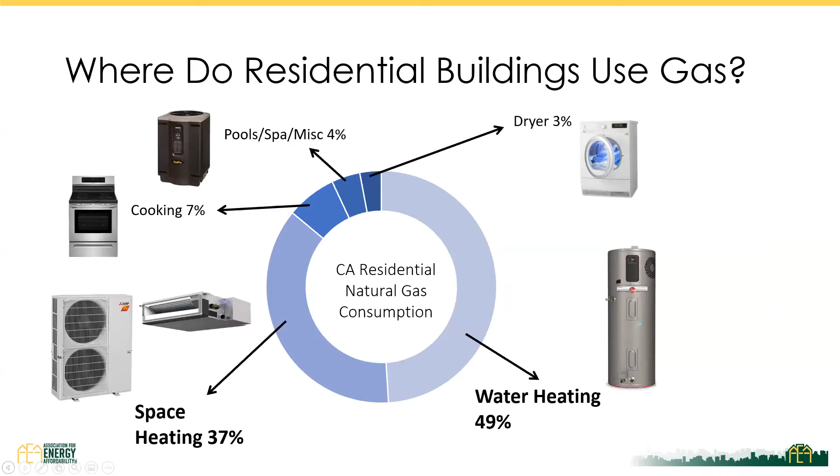And so these are all the buckets we've talked about. I know last weekend there was a lot of discussion on cooking. Today we're going to talk about space heating and water heating, because the reason why we're going this way for all electric—Amy set it up nicely, and I think you had an introduction last weekend about the multiple benefits here. From safety, from eliminating NOx and CO in our homes, to improving our indoor air quality, to achieving our climate goals, both locally and statewide, as well as improving our resiliency. And also, if you think about utility costs long-term and the opportunity to offset our electric utility costs with renewables.

I'm going to go through the next couple of slides pretty quickly because I think they should be kind of a refresher from other conversations. And so I want to get to the heart of it.

Just to put this in context here, this is not a flash in the pan. There's been a lot building in this way. So even in 2020, with our 2019 code, we had an all-electric pathway for residential, low-rise residential, which was huge, making it much easier to build all-electric. Today we have over 40 jurisdictions that have all-electric new construction ordinances. We have CCAs and utilities looking at carbon-free electricity and offering that option. And as we look forward to the future, these policies that are driving activity today—we have 50% of our electricity provided by renewables by 2030, and we're doubling our energy efficiency.

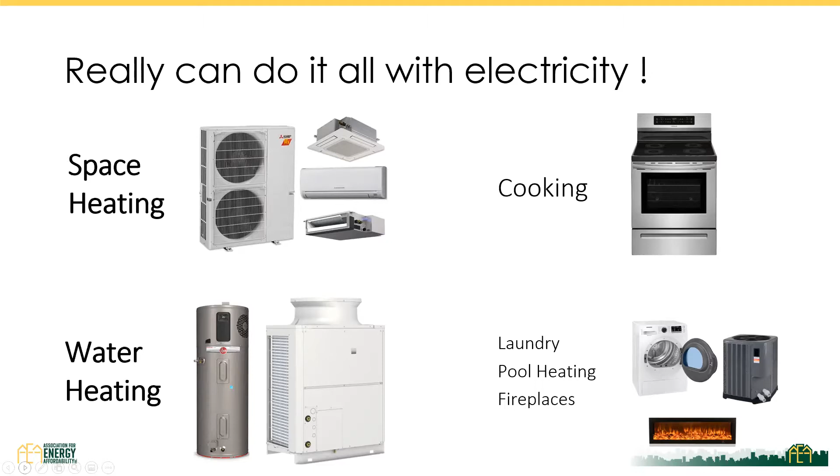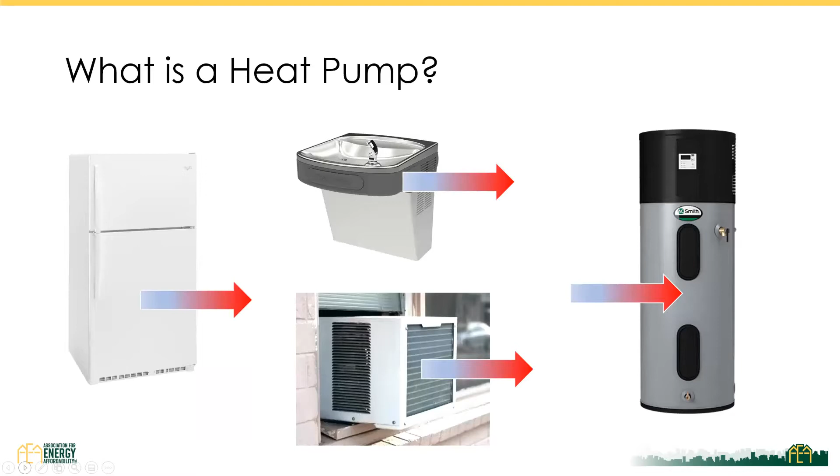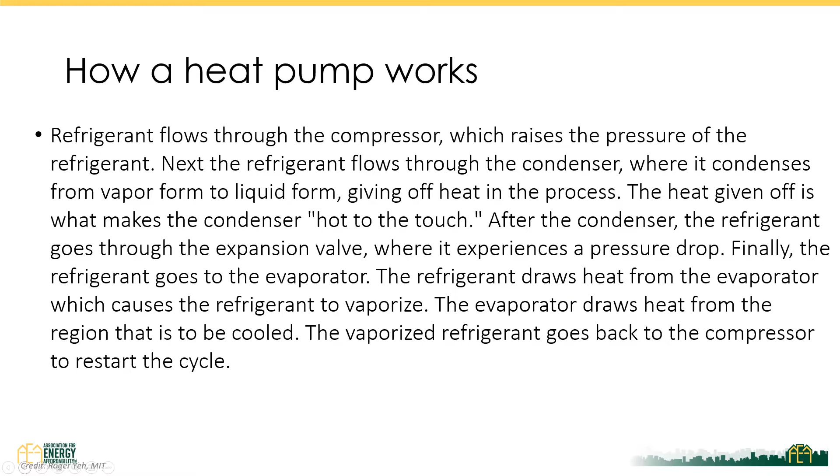So essentially, you can see all of these are moving cold air to hot air in some fashion or the other, depending on the intent of it. And so this is what a heat pump does. You're never going to say that at a cocktail party or at a gathering. That's a little more complicated. What you need to know is it moves heat from one place to another using a refrigerant. It's that simple. It's like air conditioning, like a refrigerator, right?

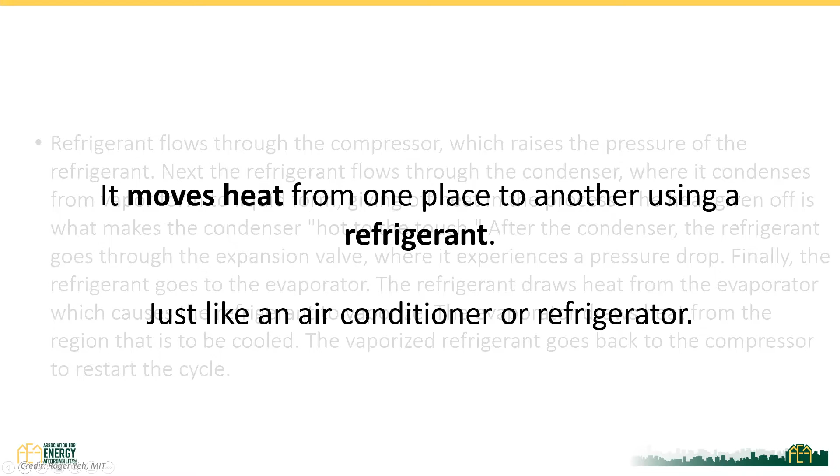Our refrigerators are expelling heat into our kitchens. Air conditioners are pulling heat out of our rooms and expelling it to the exterior. And so it's really just a simple process. If we think about our high school physics days, going back to that, as we think about moving things from high concentrations to low concentrations, it's pretty basic kind of principle here.

So really, when we're looking at heat pumps, we're looking at high pressure. You can see on the right, it's moving through and it's being compressed. And when we compress things, they get hotter, right? So they can gain heat. And then as things move from high pressure to low pressure, when we release that pressure, they can release heat. And so it goes through the cycle of high pressure to expel heat, lower pressure where it can absorb heat.

And it will run through that cycle of that refrigerant cycle, either drawing heat from the inside and expelling it like an air conditioner. Or in the reverse, as we talk about heat pumps with reversing valves, you're going to be bringing heat into the home. So you'll be pulling heat from the exterior and bringing that into the interior of the home.

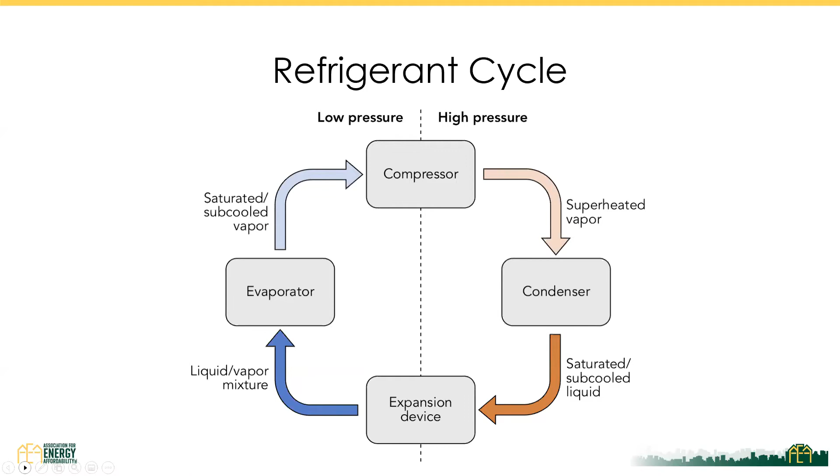So why do we really like heat pumps so much? A couple of great things: they're super efficient. If you look at heat pump ratings, they're about 3 to 5 times as efficient as our gas products. Even our most efficient gas furnaces, like the condensing furnaces some of us may have in our homes, are about 98% efficient. Heat pumps and heat pump water heaters are greater than that. An electric resistance water heater is 100% efficient. A gas water heater that we also may be used to, the gas tankless, is like 76 to 78%. I'll talk about water heaters in a moment.

They enable zero emission buildings, because they are electric, we can offset them either with on-site generated clean energy or if we are getting clean energy from the utility. They improve indoor air quality, because we're not having combustion in our homes, we don't have gas lines in the building. We can also deliver heating and cooling with a single system because these heat pumps have a reversing valve—they provide heating and cooling. And there's functionality to work in different climates, and we'll talk about the different configurations of these systems that can address different existing buildings.

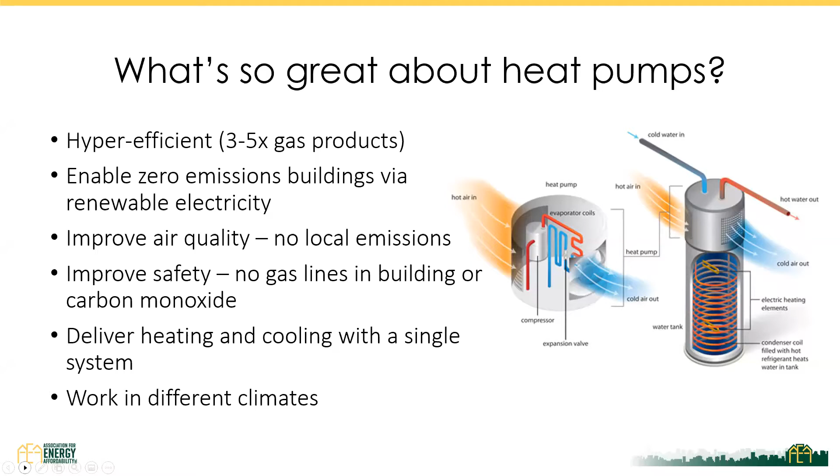So let's talk briefly about heat pumps for space conditioning. Following this, there'll be tours of different homes with these different systems in them.

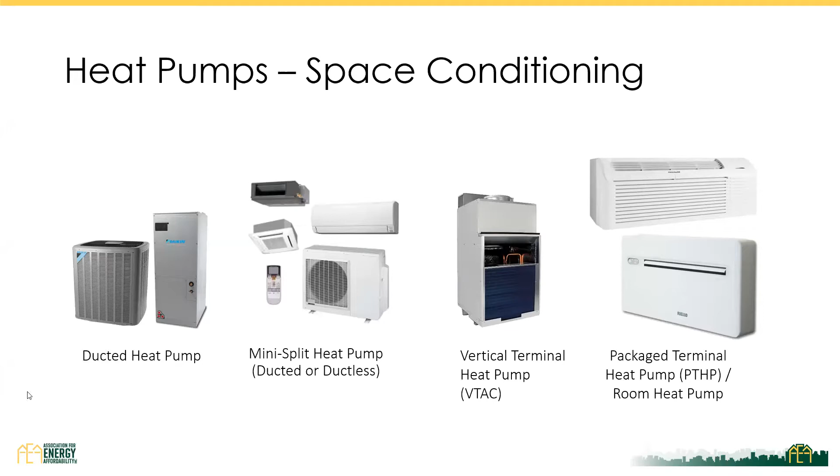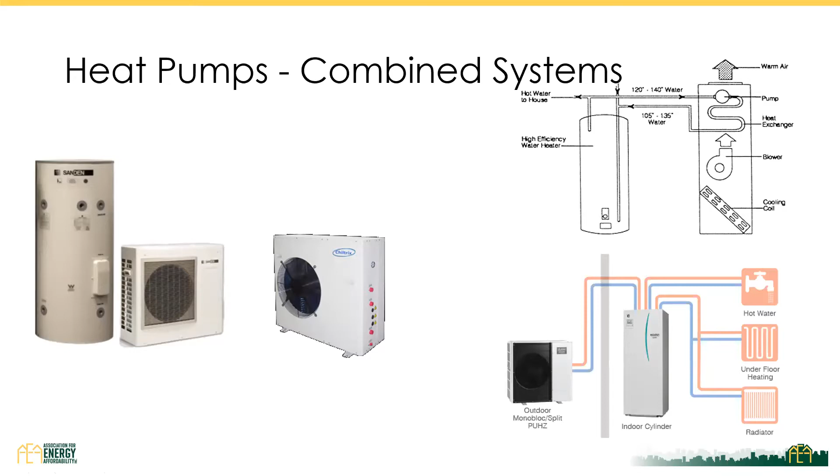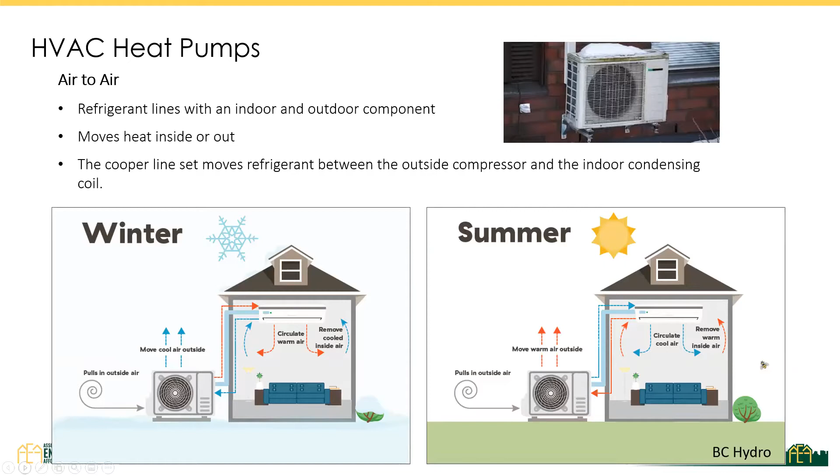So some things to consider as you're listening to the different tours—you can hear where selection made sense for different home configurations, loads, and needs. First off is feasibility and constructability, what can actually be installed. I showed you a variety of options that can meet different loads and building considerations. So as you're looking at what's available, what space there is, and what the load is, maybe the package terminal heat pump is a good option, or maybe you're looking at a slim ductless or ducted mini split.

This may also be informed by electrical capacity—you'll be hearing about smart panels later. We're often thinking about that load calculation, so we can consider what systems can fit into an existing panel or be accommodated if doing a panel upgrade. You also have to think about costs: first cost, maintenance costs, and lifetime costs. Lifetime costs should be going down for electricity, particularly as we look at future rate changes and the contribution of PV to offset our loads. And last but not least, you have to think about the AHJ—authority having jurisdiction—who is authorizing those permits.

So there are some considerations in terms of visibility from the street for that outdoor unit. Are there considerations for setbacks on where you can locate that outdoor unit on the side yard? Are there particular noise ordinances?

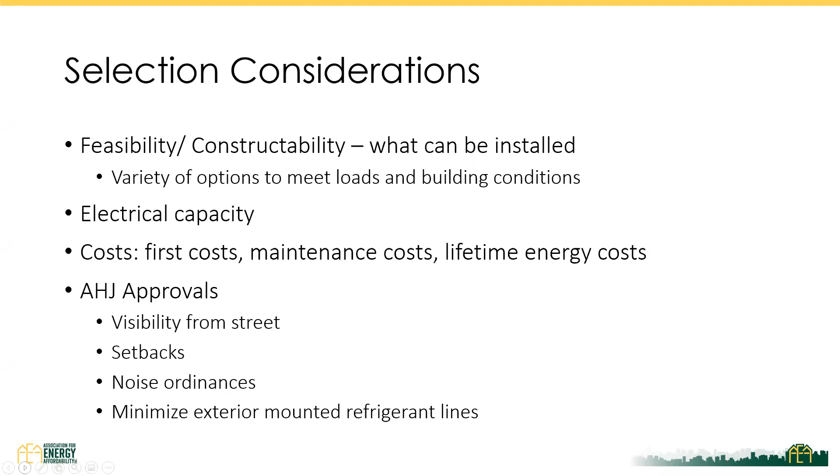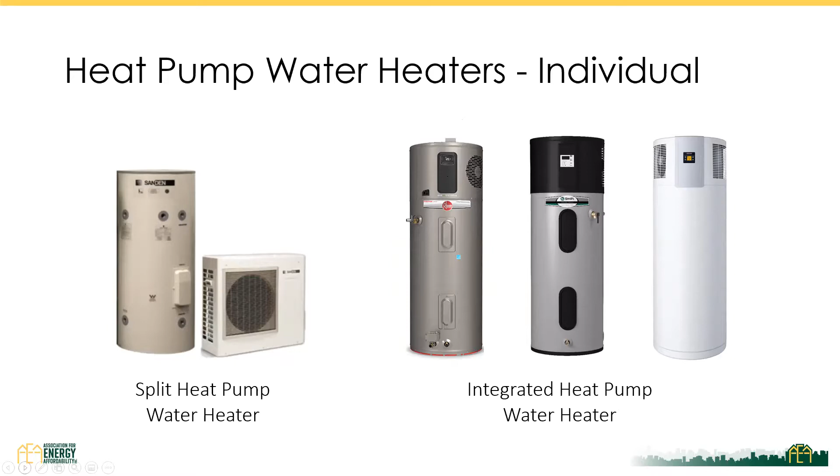So I have two different kinds of systems. I'll talk about some considerations in a minute. Again, all of these are electric. They employ storage tanks. Most have a heat pump, that compressor, and a resistance element, which is the electric resistance element. We look to operate them to maximize the heat pump operation because that is the most efficient - it's just moving heat from one place to the other - and only utilize the electric resistance element to address higher draws, additional capacity when needed, as a boost. Some, like the split system, don't even have an electric resistance element.

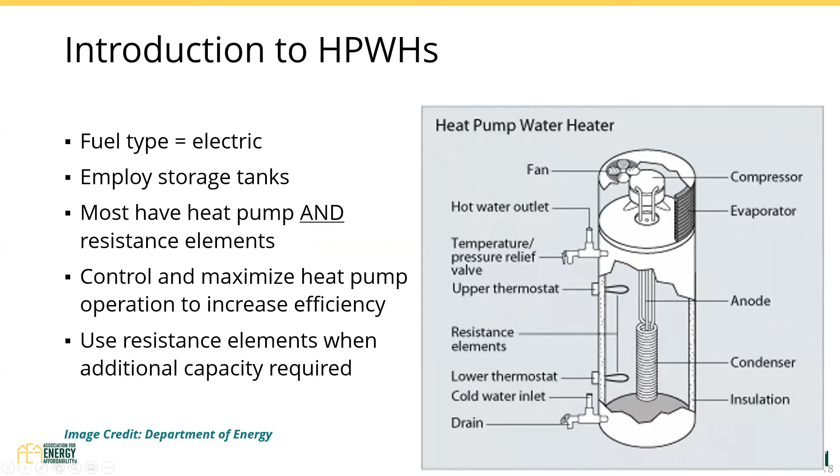I just want to point this out because there's a lot of questions. Under the 2019 code, you can install heat pump water heaters and they can replace gas storage water heaters. I saw a number of you raise your hands that you have a gas water heater in your home. Just calling this out because it has evolved in the code over time, and the code is encouraging heat pump water heaters in new construction.

So a couple of things on installation, and then I don't know if we have time for questions, or I can answer questions in the chat. So a couple of things.

Most require 240 volt 30 amp electrical supply. Some of them are 240 volt 15 amp. We do have some coming on the market that are 115 volt, 15 to 20 amp, kind of retrofit-ready for smaller loads. That's really looking at how to balance out achieving all-electric homes and minimizing capital improvements or electrical infrastructure upgrades. So we're having new product to address that.

Like gas water heaters that need makeup air, heat pump water heaters also require access to an adequate volume of air or ventilation, because it's pulling air across that coil to extract the heat. The manufacturers have recommendations of 750 to 1,000 cubic feet in that room, and you need to make sure the vents are not blocked so they have access to that air. The preferred location is more in hotter areas like a garage, because we're trying to pull that heat out of the air, and warmer places result in higher performance.

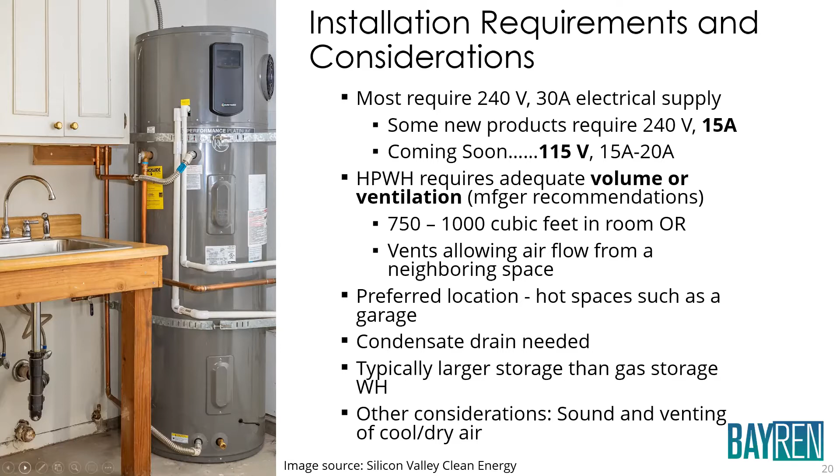I have 2 slides left here. A couple considerations: I talked about location. You want sufficient makeup air. Make sure we've got venting. You want to minimize compressor noise. I also want to call out, you want to use high performing equipment.

The energy code is also pointing toward NEEA, the Northwest Energy Efficiency Alliance, tier 3 rated heat pump water heaters. They have lower decibel ratings, can be configured with demand response, and are higher performing with a higher COP - generally a minimum of about 3.2.

The third bullet I really want to call out: if you're installing a heat pump water heater, install a thermostatic mixing valve. That allows you to heat your water in your hot water tank to a higher temperature than you want it delivered at your tap. So I can heat it to 140 degrees as an example, and deliver it to my tap at 120 to prevent scalding.

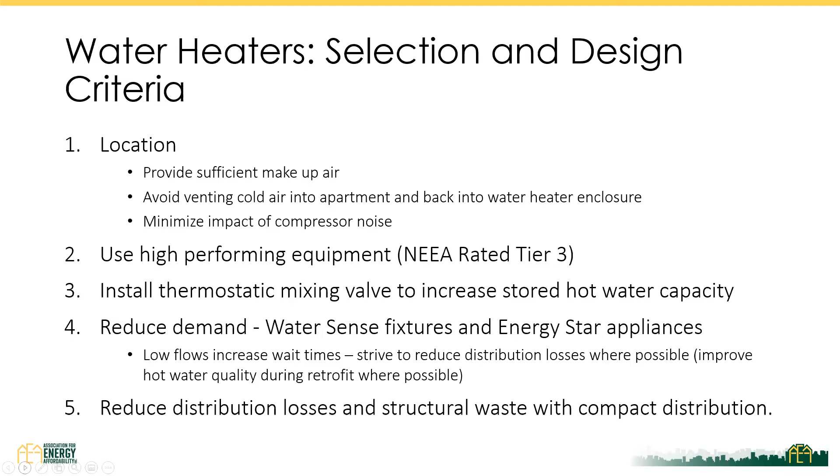And you can reduce demand with more efficient distribution if possible, and WaterSense fixtures and appliances.

So lastly, in closing, a number of jurisdictions are passing ordinances that favor electrification. The building code is moving toward all electric. Gas infrastructure is going to be a stranded asset. As we start moving to building electrification, we may think our electric rates are high now, but electric rates are evolving - we're seeing all-electric rate design occurring today. We can offset it with renewables, and we're going to see an increase in gas rates. So it's going to become continually more affordable, and as we already talked about, healthier and more comfortable for our homes.

So, hopefully I didn't go too far over, Amy. No, thank you so much. But I wanted to get through a number of things. Yeah, no, there's so much to get through. I really appreciate you doing that.

I appreciate the research you do to shine light on all the options and help people figure out what their pathways are. I know a new heating system is a big investment, and the choices can be really daunting. Hopefully this cues people up to identify some of the different heat pumps they'll see today in the different homes. And Amy, you can dip down into the chat and Q&A to answer questions that popped up during your presentation.

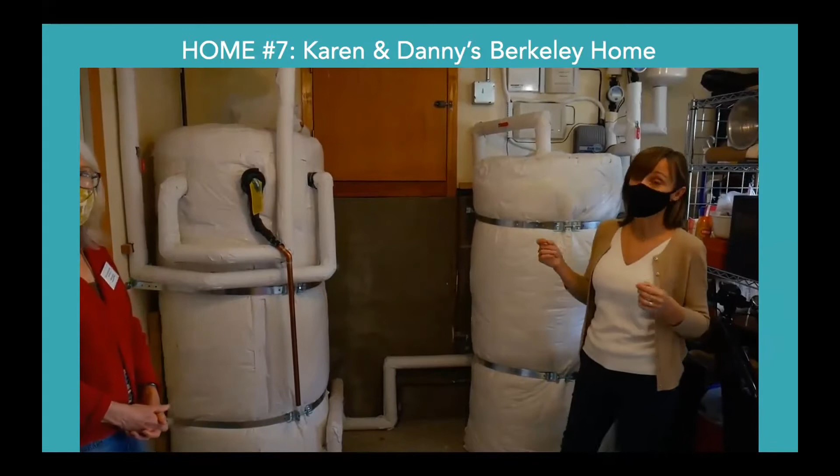So you're completely decoupling the time when you buy your electricity from the time when you deliver your heat. By doing so, you're always able to capture the solar electricity to run your heat pump, and yet you use your heating and hot water in the evenings and the morning whenever you need it. So even compared to a standard heat pump system, we reduce emissions by about 60 to 80%. But what's really important for us to have an impact is that we're also cutting people's bills, because the system chooses to use electricity when it's also the cheapest.

So this is a Sanden heat pump. It's an air-to-water heat pump, and it's basically the most efficient heat pump out there. I really love heat pumps — what they do is it's almost magical. They bring heat into your home by moving heat instead of generating it. So if you think about your gas furnace, it has to burn gas to generate heat, so it's always going to be less than 100% efficient. Because it's moving heat, heat pumps are over 100% efficient.

In fact, this heat pump's specified performance is 500% efficient. So just one heat pump is generating heating and hot water, and it's so much more efficient than any gas appliance. Another nice thing about it is, as you can see, it's quite compact, but it's also super quiet. In fact, in my home, it's right underneath my daughter's bedroom, and she never hears it at all, which is really nice.

Look at some of the improvements to the home that we've been doing in the last few years.

Okay, so this is inside the house, and you had a chance to see our system. But when it comes in, it looks just like any heating vent that you would have, any heating register in your home. So our heat comes through here. We have a night cooling system with Harvest Thermal that also comes through here.

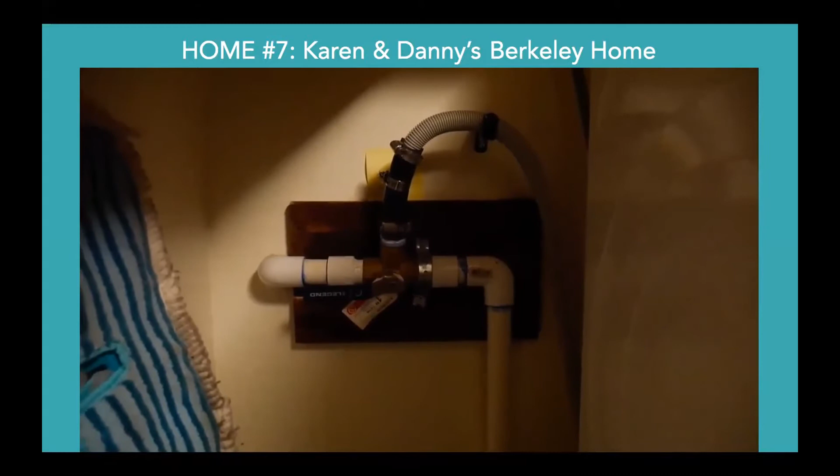We've had our hot tub for about 3 years now, and didn't want to give up everything when we went all electric. So we do have a separate electrical unit for the hot tub, and it's a luxury that we're simply not willing to give up. It's special to us, we enjoy it a lot, and we're out here a couple nights most weeks.

Okay, this is one of our rain barrels. We have 5 rain barrels in the backyard, and they each hold 50 gallons, so 250 gallons total. One of the parts of the system we're really pleased about is that 2 of the barrels, this one and one on the other side, are fed from rainwater. The other 3 are fed from rainwater and our irrigation system.

We have an upstairs deck, and that irrigation system waters the plants up there, and then comes down, and that water goes into the rain barrels. So we're able to use these rain barrels 12 months out of the year. They have a faucet on the bottom, so we use buckets, mostly to water all the plants we have in pots, and also to supplement our drip system. It's a pretty high efficient use of our water system.

So our plan is eventually to put in some pumps - you can put pumps inside them so that you have more pressure to get the water out. We haven't done that yet, next step. Okay, so we've had our solar array on our roof, we have 18 solar panels, for about 5 years now.

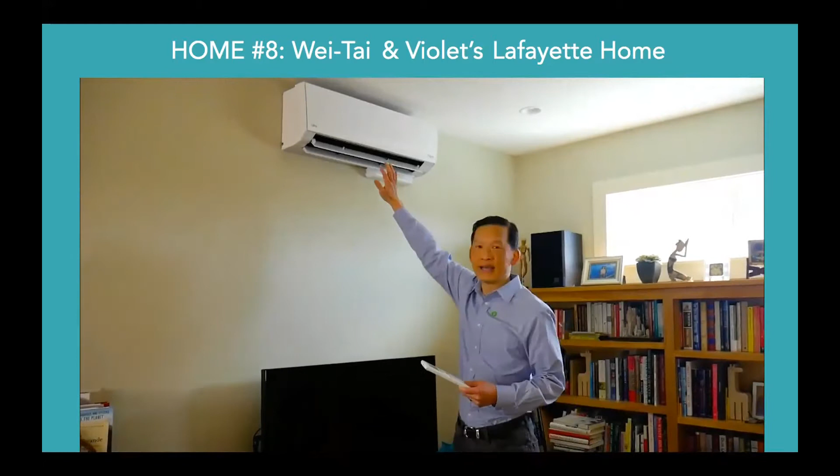I've turned it on to heating right now, and I can feel a lot of warm air coming out to warm our house. The benefit of having 8 of these units is that we only need to heat the rooms that we're actually in. So at nighttime, we just heat the 1 bedroom and not the whole house. That makes it a lot more energy efficient by having those 8 zones for heating and cooling, and we've noticed that helps save on our electricity bills.

Let's check out the heat pump mini split in the bedroom here. I'm going to turn it on, and you can see how the remote control will open the louvers and start putting out hot air from the vents right there into our bedroom.

I want to show you some of the carpeting and flooring we used in our house. This particular flooring is made by a company called Interface, and a brand called Floor, F-L-O-R. It's great because they are one of the most sustainable carpeting firms in the world. One of the things we like about it is that at the end of life of this carpet square, you can ship it back to Floor and they'll fully recycle everything into new carpets.

If you ever get these dirty, you just go wash them off. Or if they get stained, we have a couple extras and you just plop them in here. So it's just that easy. And believe it or not, they actually do stay down perfectly well.

The great thing about a bamboo floor is that it's made from a very fast growing grass rather than wood, which takes a long time to grow. So it's a much more renewable resource. In just 5 to 6 years, you can create bamboo flooring like this. So we really like that idea of using something more sustainable than wood, and that is bamboo.

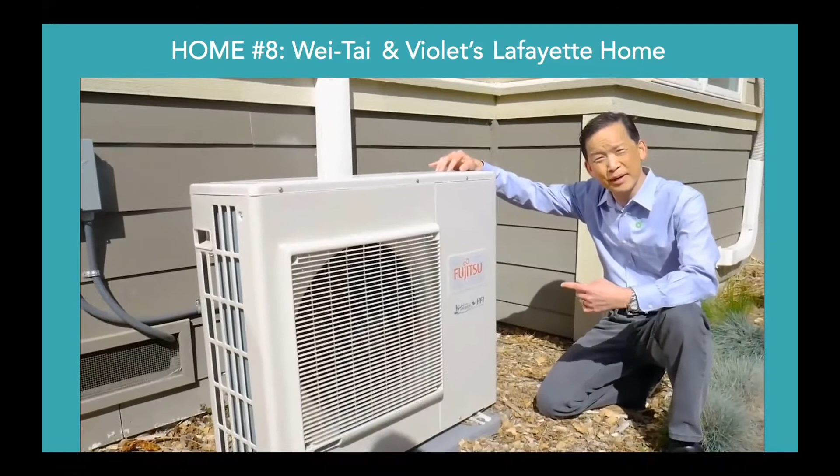I want to show that it's actually not too noisy. One thing I was worried about was whether or not the fan would be loud. But I'll stop talking and you can sort of see it's not that bad.

This year, we also replaced our asphalt shingle roof with a metal standing seam roof. One of the benefits is that it's more energy efficient and fully recyclable at the end of life. It's more energy efficient because it has less mass, so it absorbs less thermal energy from the sun in the summer compared to asphalt shingles. My wife and I definitely noticed during hot spells in the summer that our home was noticeably cooler because of the better insulation factor of a metal roof. Also, metal lasts a lifetime, and rather than replacing our roof every 20 years, we felt we could keep all that asphalt out of the landfill and use metal, which is fully recyclable.

All right, here's my electric car charger, which is connected to my solar system, and we're going to plug it into the front of the Nissan Leaf. It's a 240 volt charger. Here we go. In about 3 or 4 hours, the whole car will be charged up and ready to go with 100 miles or so.

Now, part of our retrofit involved adding insulation to our building envelope to make it really airtight, and sealing the ceiling and so forth. But that meant we needed mechanical ventilation added. So we got this HRV, heat recovery ventilator, which helps bring in fresh air from outside, but it also transfers some of the warm air from indoors, so it's not all just wasted outside.

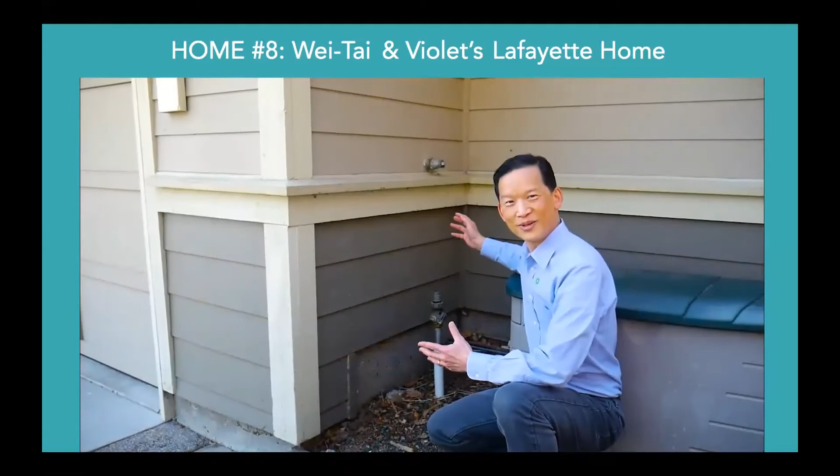Well, this is where my gas meter used to be, right here. Here's the gas line from the street, and here's the line that goes into our house. I'm happy to say that after we retrofitted our home to get rid of all fossil fuels, we were able to remove our gas meter and disconnect from the PG&E gas grid. Originally, I thought this was like an impossible thing to do, but it turns out that we did it in just 45 days. So if you think it's impossible, like I thought it was impossible, I hope you'll be inspired to know it's not impossible. And if I did it, you can too.

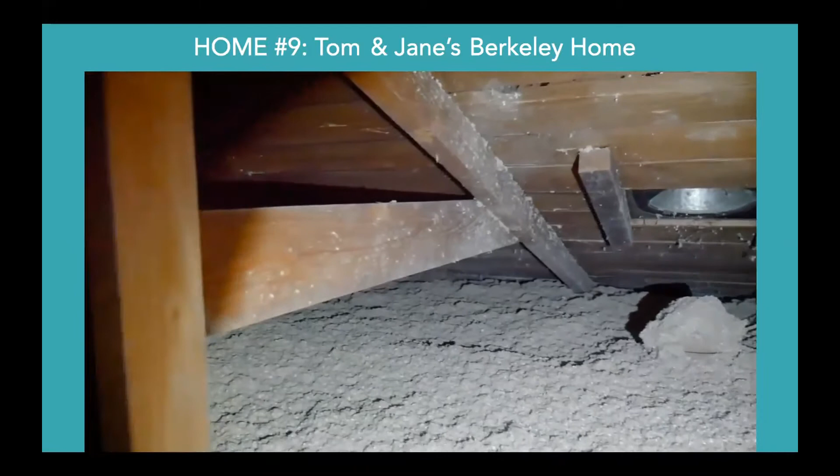The light-colored roof reflects sunlight and helps keep the house cool. Below that roof is our new R44 insulation, which is doing a great job. In order to install the insulation, we upgraded the knob and tube wiring, removed the old insulation, cleaned out any debris, and then blew in the new material. Blue Rock Home handled the cleanup and the blow-in and did a great job.

R44 insulation really is quite thick. This is the hatch or the door to the attic in order to get up, and that's how tall they had to make it in order to put R44 in the attic.

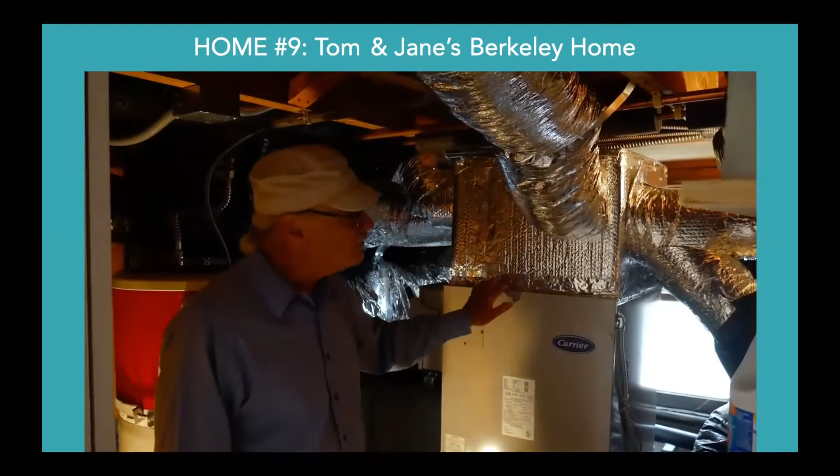The heat pump compressor on the top of the roof sends either cold or hot refrigerant down into this unit. The unit transfers the heat from the refrigerant, or the coolness from the refrigerant, into the house through the ducts. We also installed a HEPA air filter. The air filter has been a real savior during the smoky season and fire season that we have. It absolutely clears the house of all that smoke and makes us feel much, much better.

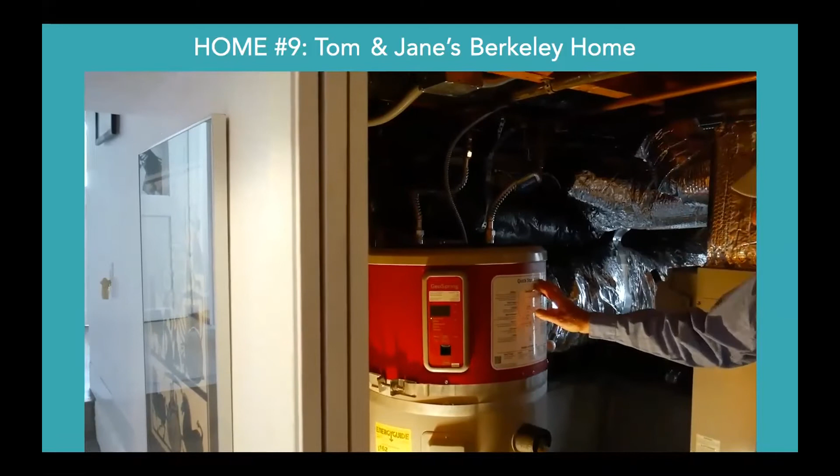This unit is our 50-gallon heat pump water heater. 99% of the time it operates in heat pump only mode. On the occasion when my extended family comes to visit, we put it into hybrid mode, and at that point it uses not only the heat pump but also resistance heat to meet the demand.

One last step before we conclude this. This is the electric vehicle charging station, and right now it's already plugged into the car. So we're taking the power from the solar panels and putting it right into the battery.

It took us a little over 3 years to accomplish what I've just showed you. Our utility bills have either been slightly negative or just a few tens of dollars per year. Our clothes are dried, our food is cooked, our water is hot, and the temperature of our house is either cool or warm, however we'd like it. We're very close to being a carbon-free home. You can do it too.

Okay, thank you so much, Tom. Are you here? Can you get a spot? Yes, can we get a spotlight? There you are. Hello. Hi.

I was really interested because I live on a very narrow lot myself. A lot of the heat pumps that I saw on this tour were close in to the back of the house or close into the side, but you ended up with one on your roof. Is that typical? Do heat pump companies know how to do that, and is that not unusual? How did you figure out that this was an option for you?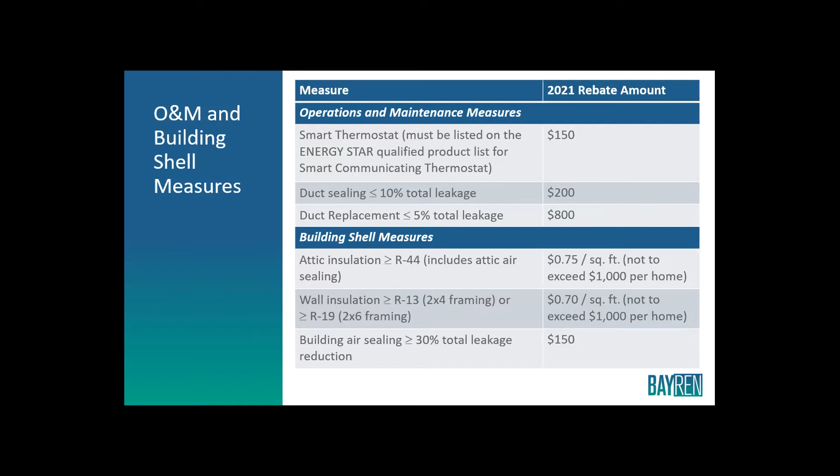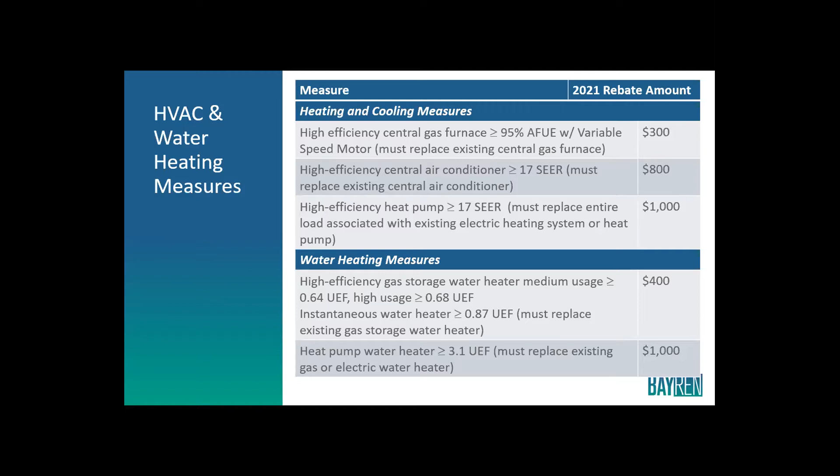For heating and cooling upgrades, there's a $300 rebate for a gas furnace, though that rebate has been reduced year over year as we transition toward an electrification focused program. The rebates for high efficiency heat pump equipment are on the rise, while the gas rebates keep getting lower, because we want to provide more incentive for electrification options. For example, there's a $400 rebate for a gas water heater, but a $1,000 rebate for a heat pump water heater.

Also, for heat pumps, if you're going from a central gas furnace and central AC to a heat pump system, there are rebates available there. And again with the heat pump water heater, it's a $1,000 rebate whether you have an existing electric resistance water heater converting to a heat pump water heater, or if you're going from a natural gas tank or tankless water heater—there's a $1,000 rebate available.

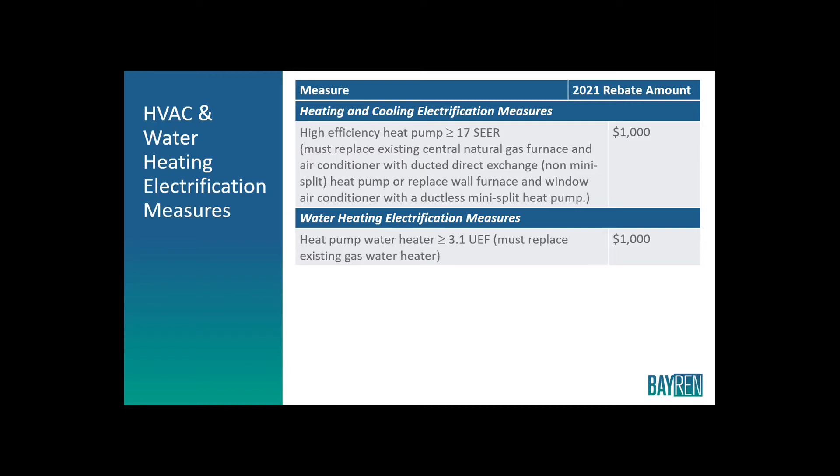For the electric range and cooktop, it's not something we require a contractor to install—you could purchase the unit, have it installed, and then apply online for a $300 rebate for the cooktop, and a $300 rebate for the heat pump clothes dryer as well.

We also have some bonus incentives available to help incentivize taking a whole home approach to the project. If you combine a building shell measure like insulation or air sealing with a heating or cooling upgrade, we'll pay an additional $500 for that project. Same with insulation—if you're insulating your attic and walls simultaneously, there's an additional $500 rebate available. There's also an incentive to downsize your existing equipment, reducing the amount of BTUs the system puts out, which comes with a $100 rebate.

There's also a combustion appliance safety test incentive of $150. The majority of projects applying for a rebate in the BayREN program require this test, where a BPI certified professional will go to the home, and if there are any gas appliances left, like a gas oven, gas water heater, or gas furnace, that professional will test the equipment thoroughly to make sure there are no carbon monoxide issues and the systems aren't producing excessive levels of carbon monoxide. They also test the draft of the system to make sure gases are leaving the house adequately—a great test to have done if you have any combustion appliances left in the house.

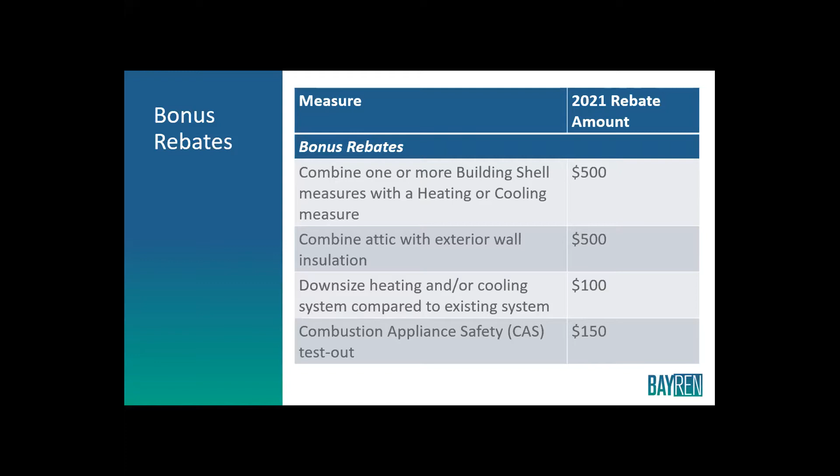In addition to the BayREN rebates, there are also additional layered electrification rebates out there. Community choice aggregators, or CCAs, offer additional incentives when converting from natural gas hot water heaters to high efficiency electric heat pump water heaters. Tai mentioned being enrolled with Marin Clean Energy, which is one of our CCAs offering an additional incentive for heat pump water heater natural gas conversions. So if you're enrolled with Marin Clean Energy, have a heat pump water heater installed, and apply for the $1,000 BayREN rebate, there's an additional $1,000 rebate kicked in from Marin Clean Energy for that same project. Other CCAs include East Bay Community Energy, Sonoma Clean Power, and Peninsula Clean Energy, so depending on where you're located throughout the Bay Area, there may be additional incentives available to you.

And certainly something one of our energy advisors can give you more information about.

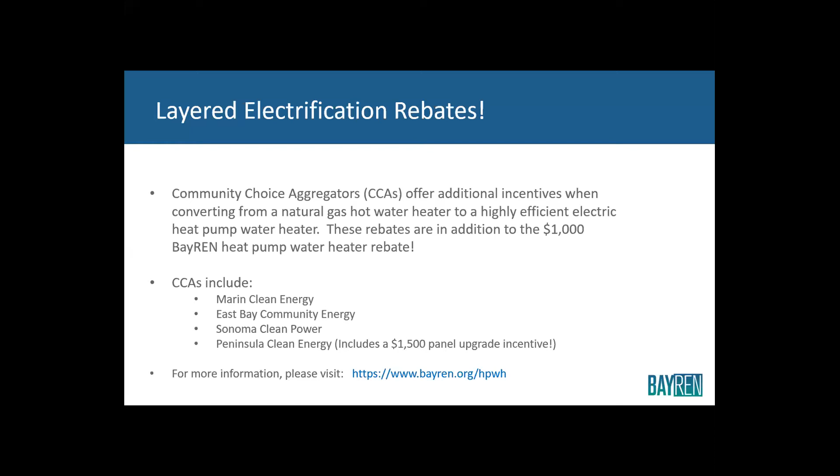You can also go to the BayREN.org heat pump water heater website, and there's more information on the rebates that are available, as well as the contractors in your area that you can work with.

So often when we're talking about rebates, the conversation for financing comes up. There are some options available in California. One of them is REEL financing, a loan you can take out. It's a very low interest loan, and they have a lenient credit score requirement, I believe like 580, 600. They'll still approve the loan for green energy projects. Contractors do need to be enrolled with REEL financing, so if you're already working with a contractor, you can encourage them to follow the link and get registered so they can offer financing on your project.

And there's PACE financing as well, which is a similar program where the payments will actually be added onto your annual tax bill. So that's another option you could discuss with your contractor.

We're also going to talk a little bit about electrical service panel upgrades. Usually when you are doing a home electrification project, certainly in older homes in California, there are ways to avoid panel upgrades.

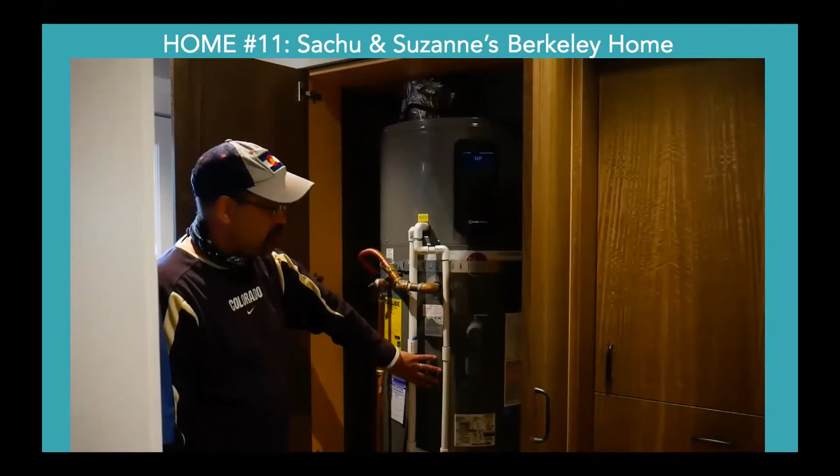A heat pump pulls heat from the air up in our attic into the heat pump. The heat exchanger puts the warmed air into the hot water, and it blows cold air out. Typically, if you put this in a garage or a small room, it will actually lower the temperature of that room. Here in this closet, we just pump the cold air out into a shed, which keeps some of my supplies, my paint and stored maple syrup and things like that from getting too hot. It actually keeps that shed almost like a walk-in cooler.

We already had laundry, but as part of the remodel, we just made sure we got a more efficient washer and dryer. These are both front loader units. We had converted from a gas dryer to an electric dryer, and it works really well. We try to line dry as much as possible, but for quick items or some heavier items, we might use this.

All right, so here we are at the home energy system. This is my power plant, if you will, or at least the control system for the power plant. We started, as I said, by putting solar on the house. This was quite a while ago, right when we moved into the house. We put solar on.

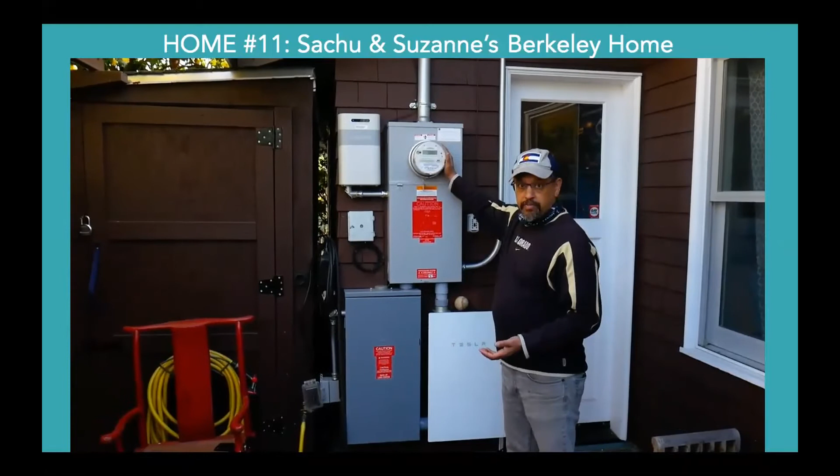They tied that into our meters here, and that powered our house, but of course, without storage, when the power goes out, you can't even access that solar. So we added storage as part of the remodel. All the equipment, the control equipment for the solar panels and for the battery, are mounted here right next to our utility box. What we did in this house, because I put 2 Tesla Powerwalls on, which is a little bit excessive, but also probably warranted here in California, is have the entire house electrical system backed up here.

That's why this box is so big. Typically, for a battery system attached to solar, you'd have a smaller box with just a few critical circuits on here, so maybe 3 or 4 or 6 circuits. I have every circuit in the house in this electrical panel backed up off of our 2 Tesla Powerwalls.

So the solar, I have SunPower panels, and Tesla Powerwall, and they work seamlessly together. That's not a problem at all. Solar not only powers all of the lighting and equipment and everything in the house, it also helps us charge our electric vehicles. We also electrified our transit as much as we could.

I actually have 2 chargers available to me here at the house. This one is just wired into the normal electrical system of the house. It's a typical charging cord. I run it out to the car, or if the car's parked in here, we plug it into the car. It's a level 1 charger. It takes a few hours to get a decent charge on, but it works great.

I also have, over on the side of the garage, a level 2 charger. This is an AeroVironment level 2 home charger, and that'll get me a pretty fast charge. I can probably get about 50 to 60% of my battery capacity off of that in under an hour. It takes a little more for the last 10%, a little more for the first 10%. But if you're in the middle, if you're just topping up, or have a quick trip to make - Walnut Creek or San Jose or down to Monterey - charge up on that real quick and you're good to go.

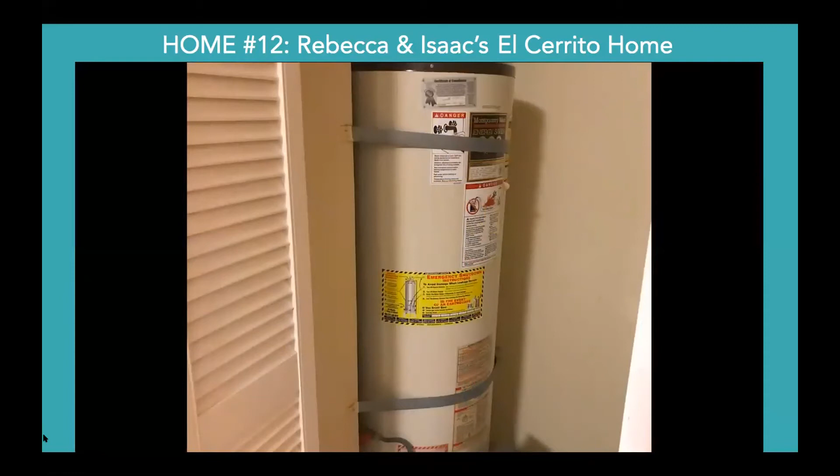For our family, electrification was about not only reducing greenhouse gases, but really about health and safety. Let me tell you what was going on in the kitchen, which looks a little complicated right now with all these wires. We had a gas water heater right here in this closet, and it was from the 1990s. That gas water heater, we were keeping it alive.

Our air quality is really bad, and because of the ventilation, we don't really know how well that was working. The HVAC company said to me, you should keep your kitchen window open all the time when you're cooking and run your fan in the bathroom. So that was okay when cooking, but the water heater, we had no control over that.

So that's what I did, and that was all fine and dandy until the fall of 2018 in November, when the horrible Camp Fire started up in Paradise. At that time, air quality in the Bay Area was really poor, and we were told to stay indoors with windows closed. So there was no way I was going to run my stinky gas stove with closed windows. I turned off the gas, and a friend of mine, a neighbor, Howdy Gowdy—some of you may know him, he's a do-gooder all over El Cerrito—loaned me these two portable induction hobs.

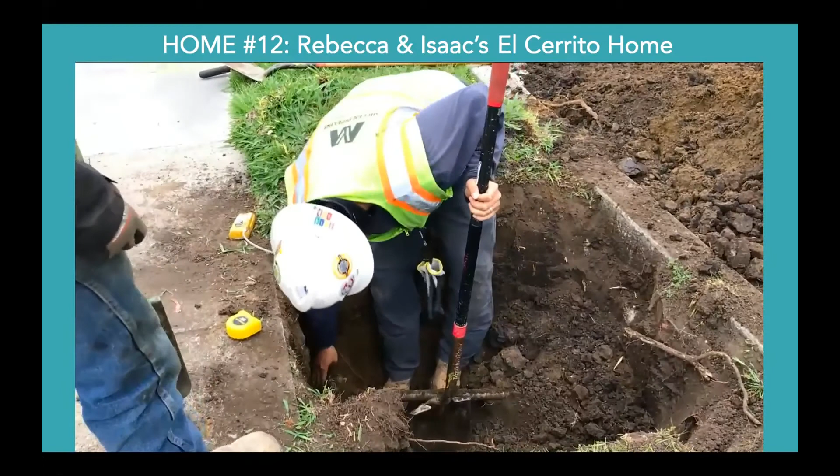So you can see these yellow lines - this is the gas lateral that goes to the main, which is across the street, running over there. And so it was capped.

Working for the city, I know that policy change is needed at the federal level, and international cooperation and collaboration. But cities play a role in setting examples and can start trends that take off, like the natural gas bans in new construction. Berkeley was one of the first in 2019, and now 44 cities have adopted building codes to reduce their reliance on gas, and that list keeps growing.

But back to me - I think individuals also have a role to play. I've done what I can over the years, small things like reusing plastic bags or hanging my laundry, to getting out of my car, riding my bike, getting an EV, etc. Electrifying my house was the next step. And as you know, it was not just for the greenhouse gas reductions, but also because of our family's health and the comfort of our home.